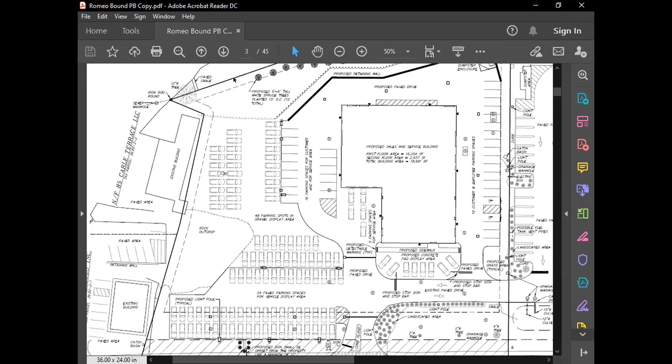Bruce, did you have a chance to look at Brinnier and Larios' stormwater report? Yeah, I took a look at their comments. There's a couple things there I can address. Most all these comments can be addressed pretty quickly between me and him. I'm not sure if there was any comment in particular you wanted to discuss further, but I can answer almost all these right here, right now if you want. But is there one you particularly want to talk about?

Let me just find them. Well, in item one under stormwater, where the reviewer said, please explain the reasoning behind the mapping of soils being different. Yeah, the web soil survey is just a general survey that's out there, based on Ulster County or all kinds of county surveys that are done. Those are just a general layout used for large tracts.

Sometimes these tests for those surveys were done on more than 5-10 acres, and they may have only had one test pit. We actually dug soil test pits out there, and based on what I found, we found a sandy loam soil just to the east of the large rock outcrop that used to be there, at the base of the hill that comes down. Then we found the same sandy soil on the west side of the rock outcrop. So when I drew my soil boundaries, I followed what we found from actual field tests versus just the generalization from the web survey.

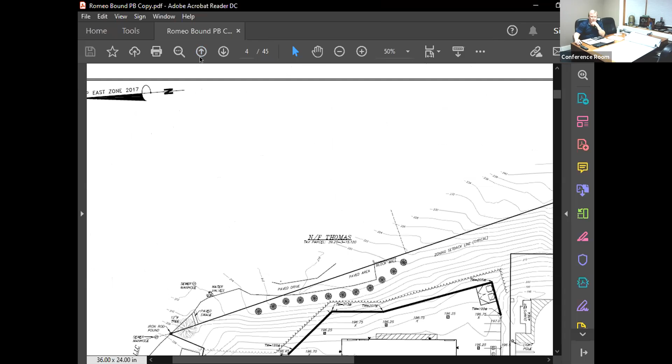The snow, we're gonna have to move some of these cars around, but there is some room for snow. We can pack the snow around the back of these cars on site there. And if it gets to be too big of a problem, they'll just have to truck it off. But for most snow events, we'll be able to push it along the back of this property line here to the east of the rock outcrop.

Okay. Thank you, okay, yep.

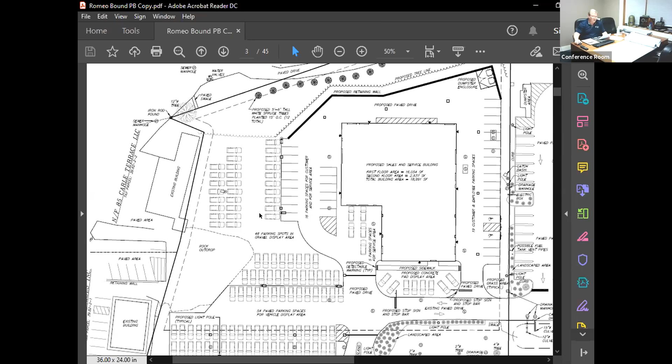Item number 5 on the comments. He asked for the site topography to be shown on the utility plan as well. I don't normally do that because it gets hard to read when that's all on there. We did go back up one more page here. I do have the topography shown on the grading plan, which shows all the rims of the structures that are there, if that's what he was wanting to check out.

But again, I'll talk to Dennis to see what he was looking for there. I don't show that normally for clarity, but there isn't a lot of topo lines here, so it may not be an issue. Okay, fine, thanks.

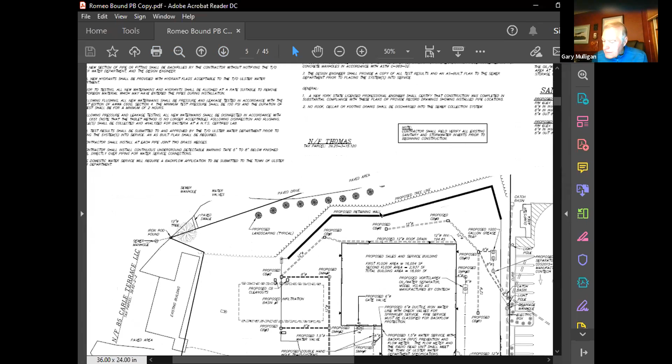Item 6. Yeah, I tried a finer routing in the model and it didn't make any difference. The results stayed the same, so there was nothing more to do for the HydroCAD program there.

Can you briefly explain what he's saying? What he's saying is, in the model, since we're infiltrating into the ground, the model starts infiltrating the stormwater at time 0. So it looks like it's already infiltrating water before the water actually gets there through the pipes. It's a very small, minuscule difference in the amount of water traveled through there. I did the finer routing, tried to get it down to like a minute, and it didn't make any difference to the model. It shows that first instantaneous water going right into the ground before the water actually reaches there. A lot of that's because the time of concentration is so quick for the paved areas and catch basins, it doesn't take a lot of time for the water to get from the catch basin to the infiltration basin. So that's probably why the results didn't change when I played around with the timing.

Are you going to explain that to Paul? Explain it to Dennis, yep. Okay.

Comment 7, basically what I was doing there with the irregular geometry was trying to model the curb along 9W, because the water flows along the curb on the road until it hits a catch basin. So I was trying to model the water flowing along the curb, with the 1-on-1 being the curb and the 1-on-8 being the shoulder going through.

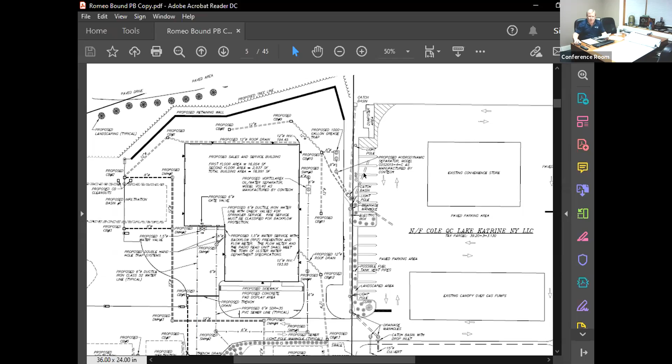For the sanitary sewer, the grease trap, they want a filter on the grease trap, I can put that on there. And the invert elevations, I show them on this sheet. I have a table with all the inverts, ins and outs, and pipe sizes, but I can add that to the detail sheet as well. So that's basically the comments from Brinnier and Larios.

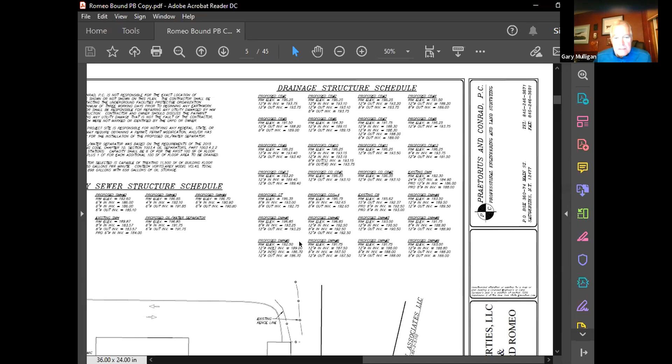The county had suggested a row of trees in the front. I don't see them on there.

No, yeah, that was going to be the next item. I'm sorry, we had this conversation back, I think in one live meeting, on how new car dealers don't like trees for the paint out front. So that was something we weren't thinking about doing, extending those trees out through the front here. We did show a little bit of landscaping around the sign area, and we showed the landscaping in the back that we said we'd give the neighbor for screening, but that's something.

So is it just that you don't want the trees to obscure people seeing the cars on display, or is it more the paint? It's the leaves falling on the paint issue in the fall. Yeah, and they're in the business of selling cars, selling their product, which is cars, and there's that issue as well as far as visibility.

So is there some kind of soft landscaping, low type of shrubs we could do in addition to the area around the sign, maybe some similar type low plantings?

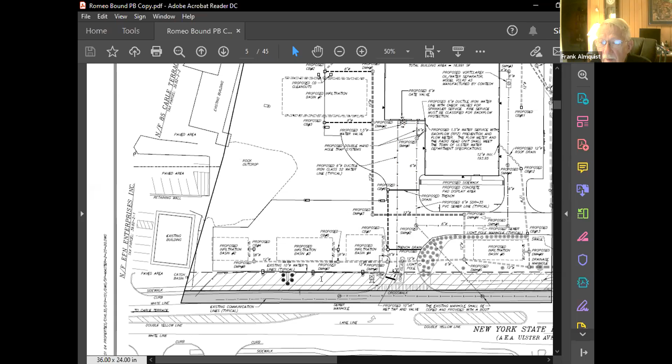You could use some ornamental grasses across there. They don't mind being pushed down in the winter time, and all they need to do is be cut back in the springtime. None of our other dealerships have anything in front of their cars. And I can tell you, as a car buyer, I bought a car that was under a tree, and I have scratches all over my car. So I get the concept of not wanting trees or shrubs around cars, but maybe around the sign would be preferable, not along where cars would be lined up.

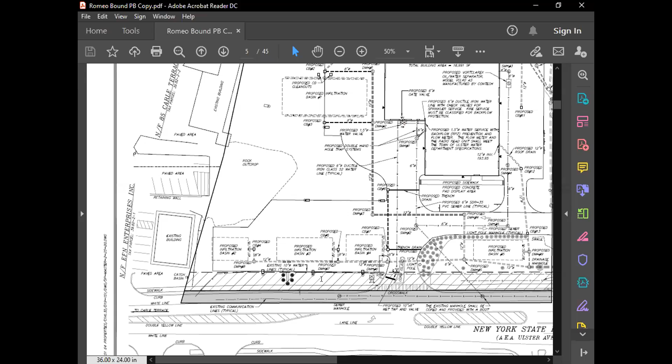Well, they do have, looks like 5 small plantings around the sign. Right there, right? Yes, correct. So, but I agree with Frank. If we did some of the ornamental grasses, they're not a lot of maintenance, and I don't think they're going to cause any problems for the paint if we did it. None at all, along there.

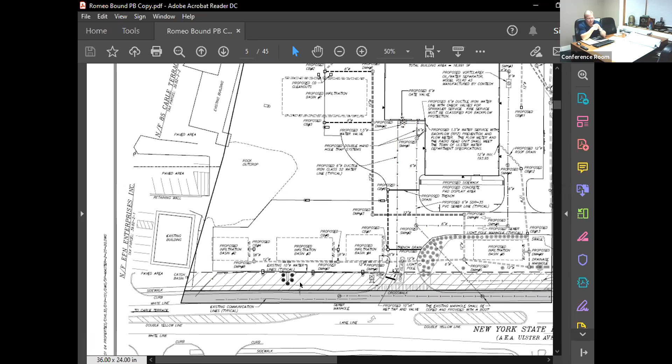I agree about ornamental grass. I agree with that, yes. If you could talk to your client, we'd like to see that. Okay, I can talk to her and see what we can figure out. Okay, thank you.

Gary, go ahead. It's Dan Church. Yes, Dan. So you have the issue that the county made that a required modification, the street trees. Yeah, so we will have to override that if that's the pleasure of the board. Correct, absolutely. None of our other dealerships have street trees. That's uncalled for. Yeah, well, part of it is to stay consistent with the Route 9W corridor enhancement plan.

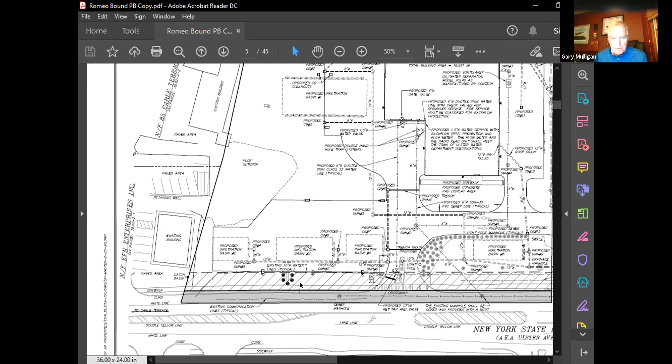And of course, if you read the county's comments, they were very pleased with the street trees that QuickChek put in and the landscaping. And that's the desired effect we're trying to bring about on that corridor. But I agree, across the street, Romeo does not have any trees, and I don't believe Honda has any, or Toyota, or Subaru for that matter. So, yeah, you can't really, you got to go one hand out of the other, and that's just the way it goes.

The corridor enhancement plan mentions as an alternative to street trees, low-lying plantings. Okay, so maybe that's something you could look at options for, Bruce. Yeah, and that might even get the board past a need to override. Yeah, that would be good, if we could do that. I suppose in a sense we're overriding the street tree required modification, but at least it would mitigate it in a sense.

All right, or at least you'd have an explanation of why you're overriding. Hello, this is Lucia, can anybody hear me? Yes. Hi, Lucia, hi there, sorry about that. I've actually been here, I've been trying to unmute myself.

We would be amenable to putting some low plantings, the grasses, anything like that, just not the trees. Okay. I'm fine with that. Board? Larry, I'm good with it. I'm completely fine with that. Okay.

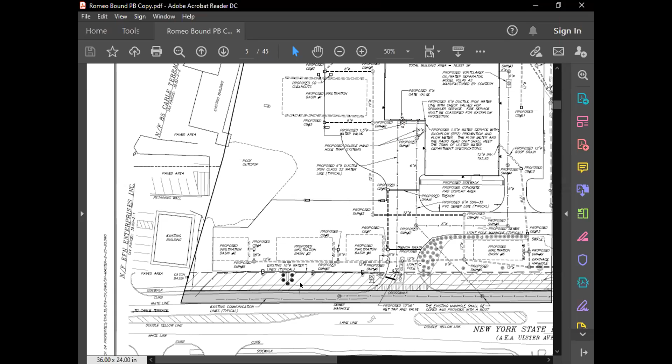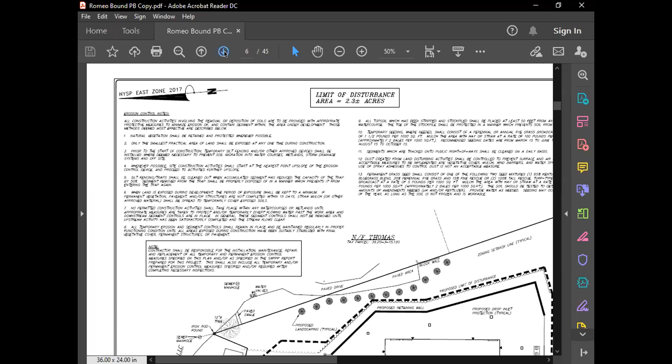Right, okay. Gary, the county also wanted, it may be worth Bruce elaborating on the sign for the board's sake, because the county made a required modification, which I found rather vague, but nonetheless, it essentially says follow the town standards.

On the last page, this is not, we're not going for a sign this tall, but this is the existing Kia sign at the existing dealership. This is what it looks like. So that's why I put this picture on there. Basically this is internally lit up on the top here where it says Kia. That head right there is approximately, I want to say 35 to 40 square feet, given the oval shape. It's in that range of 35 to 40 square feet per face.

This sign here, I think for that dealership, it's 15 foot tall. The next sign down that Kia has, a standard sign, is 9 foot tall. I think monument sign is 8 foot in that zone, but I'm not sure if you're calling it a monument or it allows up to 20 for a freestanding. But that's one thing we wanted to talk about today: if we put the 9 foot sign in there versus the 8, do we have to set it down a foot into the ground or something to meet the 8? I didn't know how critical that was, or if you wanted to call it a freestanding and go a little higher, as far as letting it go to 9 versus 8 for the standard.

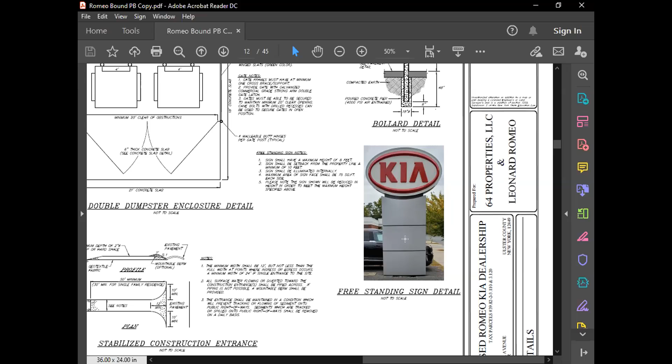So I got to figure out what the base is. Well, if you're proposing an 8-foot high sign, I don't think it's going to be 9 feet wide. I don't think we're going to be over the 75 square feet now. The sign would be taller than it is wide, so I don't think that'll be a problem.

Okay, I think the only other issue was the lighting. We had the lighting plan. I'm not sure if anybody had a chance to go through it. If there are any comments on that.

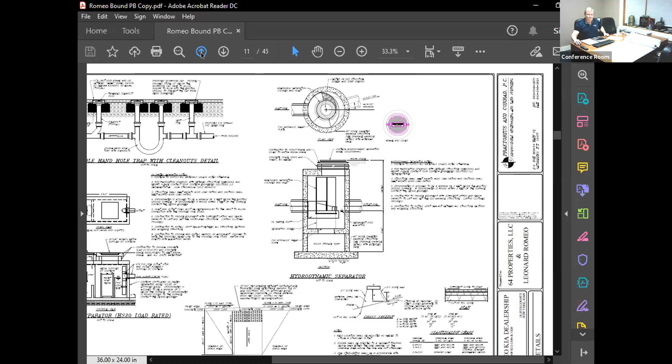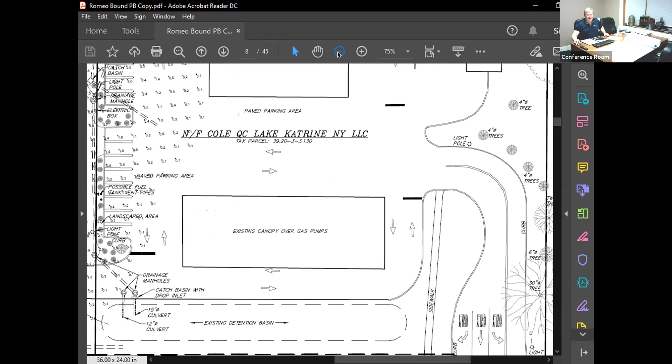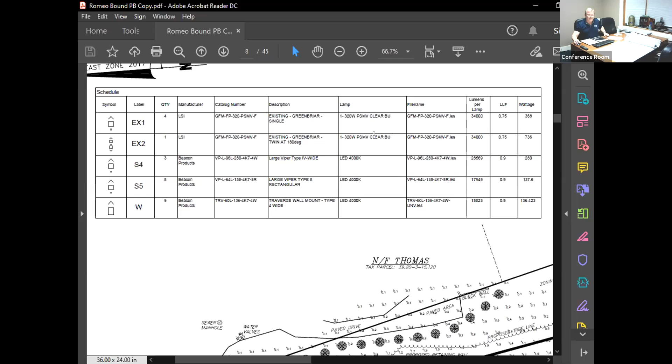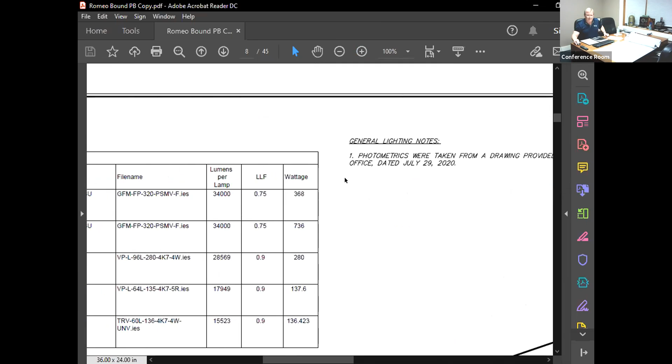So the averages, does it meet the 2-foot candle requirement? Where'd I go? I lost it. Bear with me. This is the table. I'm not seeing where the average is on here, but I was going to zoom in.

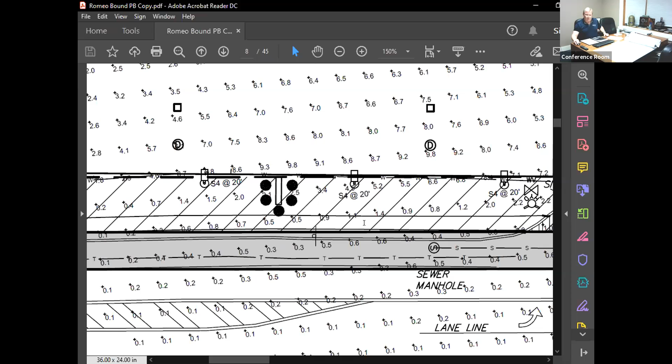You can see the light levels are pretty low. We're basically at half a foot candle near the property lines. Out by the street, we're down to 1.4. Right under the poles, we're at 7, and then it fades out as we go across the site. So I believe we're under that 8-foot candle average through there. But I thought I had that on the print.

I can verify that number with the light manufacturer. I can get that number. Okay, you said you were looking for 8 as an average? No, 2. 2 is an average, I'm sorry.

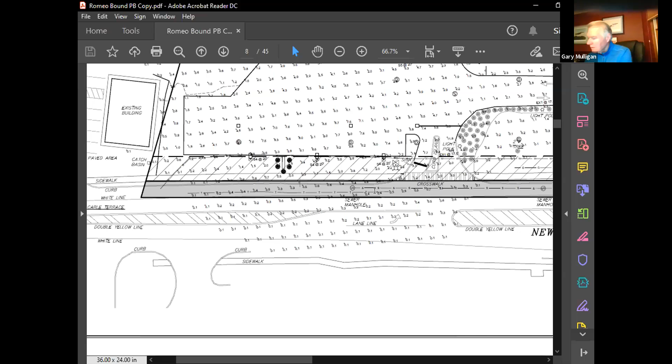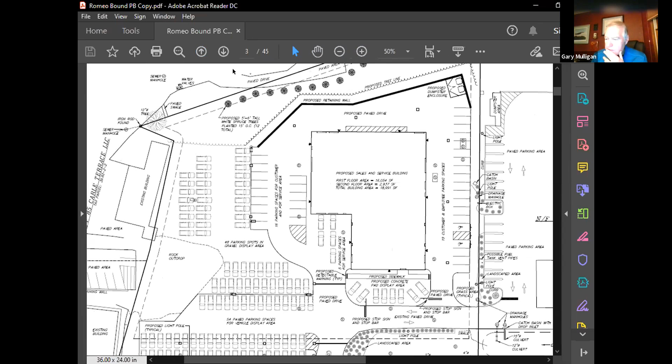I guess I'm open to any other questions the board may have. Board members, any questions? I don't have any. So we also had a lot line adjustment. I don't see where that was. Did we approve that? I don't think we approved that yet, no.

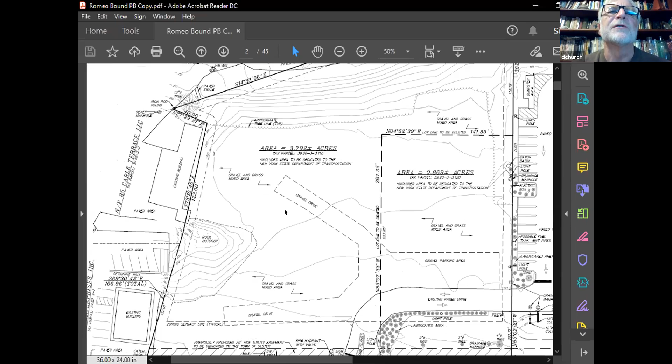On the first sheet here, we showed these lot lines to be deleted. Gary, in Alan's prior review from some months ago, it was discussed keeping the lot line adjustment and the site plan bundled. But it could easily be argued you have everything you need to approve the lot line adjustment right now.

Okay, if I could have a motion to approve the lot line adjustment as depicted in the site plan. Almquist, I'll make that motion. Second. No second. I'll second that. I'm sorry, I didn't realize it was muted.

Gary, one suggestion, Bruce, feel free to comment. You might want to condition it on the town board approval of the site plan. Okay, I'll agree to that. Who knows what'll happen, it appears that's straightforward now, but okay. So Frank, would you amend your motion that it would be conditional on town board approval of the site plan? I'll make that change. And I'll make that change for my second.

Okay, discussion? All those in favor, say aye. Aye. Aye. Larry, aye. Opposed? Okay, it's unanimous. All right.

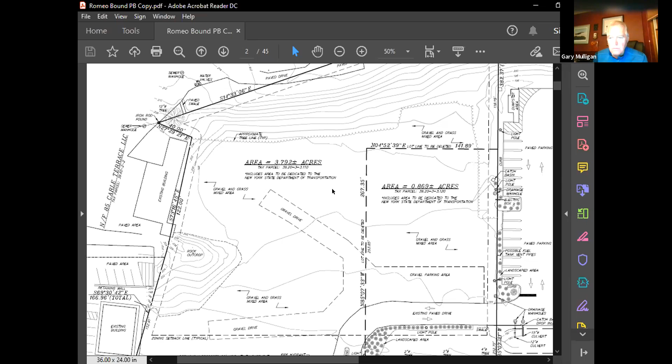I drafted a resolution for referral. Before we go to that resolution, any other questions or concerns on the part of the board? Nope. Almquist here, I'm happy. Larry, I'm happy.

All right, David, would you like to read the resolution for the town board? Sure, I shared it with the board members. With your consent, Gary, I'll gloss through a couple sections. Sure. Whereas applicant Romeo Kia dealership, with consent of 64 Properties LLC, seeks site plan approval with approval of

lot line adjustment for construction of an 18,991 square foot Kia automobile dealership and associated parking, access, landscaping, and infrastructure. And the application includes a lot line adjustment to consolidate two parcels that are identified.

Whereas the applicant has submitted a complete site plan and lot line adjustment application to the Town of Ulster Town Board and Planning Board, including a SEQR environmental assessment form. Whereas the Town Board, in coordination with the Planning Board, previously determined the Town Board was lead agency and typed the action as unlisted and initiated coordinated review under SEQR.

Whereas the application was referred under General Municipal Law 239 to Ulster County Planning Board, who have responded with 2 binding comments, which we just discussed. And I repeated verbatim the binding comments in the resolution.

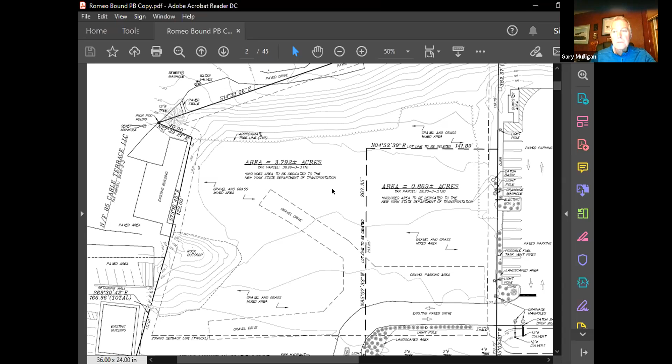All right, thank you, folks. Thank you. Thank you, Bruce. Thank you very much, Luke. You're very welcome. We'll be in touch. I'm going to try to stop sharing now. Okay, I think I did. Thanks. Thank you again. You're welcome.

Next item of business is Lincoln Park Grid Support Center. As you know, they just need an extension of the site plan approval. Is there anyone here from the applicant? I don't believe so, no. Okay, all right, so does everybody understand what's required, what they're asking for? It's a simple extension of a prior approval. Are there any questions?

Okay, hearing none. Can I have a motion to grant Lincoln Park Grid Support Center approval for an additional year? I believe that's the correct amount of time, Gabby. Yes, it's for a year. Right, okay, so it'd be till October 20th, 2021. Almquist here, I'll make the motion. Thank you, I'll second that, Larry. Okay, discussion? Have they paid the requisite fees?

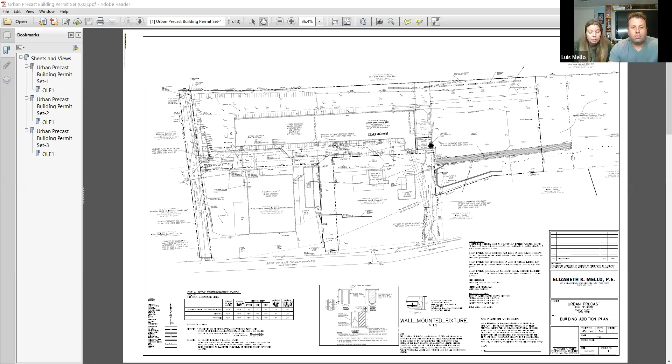This is an existing concrete manufacturing facility located at 6 Kiefer Lane. What we're proposing is a 3,533 square foot building addition to the existing building, which would provide enclosure of a batch plant that exists there.

Right now it's exposed on a concrete slab, and this would allow them to protect it from snow, ice, and cold temperatures, and continue operations over the winter. The area already has the slab, so there's no increase in overall impervious area on the property. We did not find any variances required for the addition, and it's not going to expand the current operation, just enclose a portion of it.

I have the engineer from Urban Precast here, Luis Mello, and he can answer any questions you have specific to it.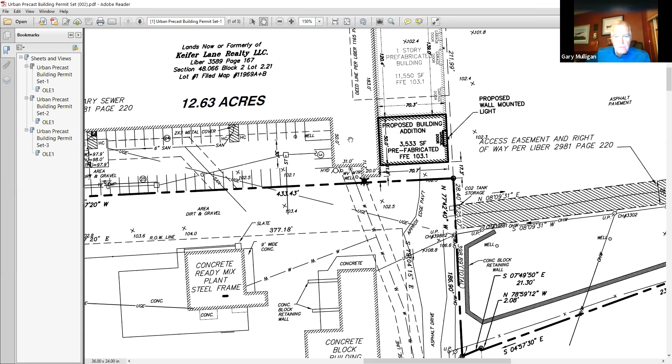Could you just zoom out a little bit? Where is that, on the northwest corner? It's on the northern side of the existing building, yes. Okay, all right, I see now.

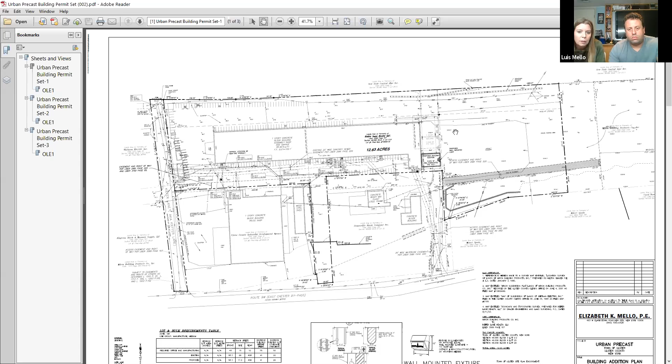The last time we were before the board, there was a building addition done previously for the batch plant. Can you zoom in a little bit? That's this area here, right? Yes. Gotcha, okay. All right.

Any questions from the board?

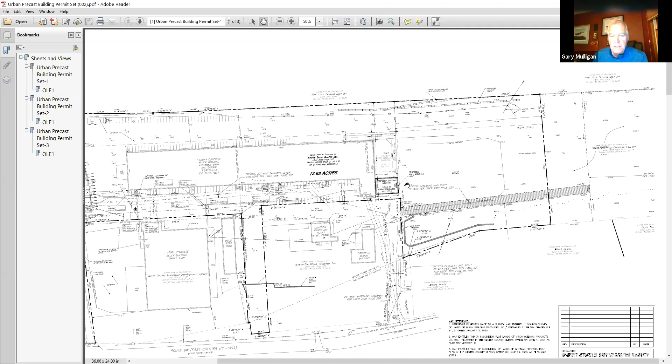Our consultant raised the issue of lighting. Is there going to be any lighting on that additional building? Oh, I see, I'm sorry, you have a wall-mounted light question. Yeah, we do have one additional wall-mounted light on that building, and that will be dark sky compliant. Yes, it will be. Good.

Any other questions from the board? None here. Pretty straightforward. This has to be referred to the town for final approval. Okay.

And so we do have a resolution. Dave, would you like to read that? Sure. This is a resolution for a referral to the town board. There's also a required referral to county planning on this one, however it's essentially exempt from SEQRA because it's under 4,000 square feet as a non-residential facility, so it's a type 2 action. No further action in SEQRA.

So, from the planning board to the town board regarding Urban Precast site plan amendment: Whereas the applicant Urban Precast seeks site plan amendment approval for construction of a 3,533 square foot addition to an existing building, and whereas the applicant has submitted a complete site plan amendment application to the planning board in coordination with the Ulster Town Board, including a submitted environmental SEQRA short environmental assessment form.

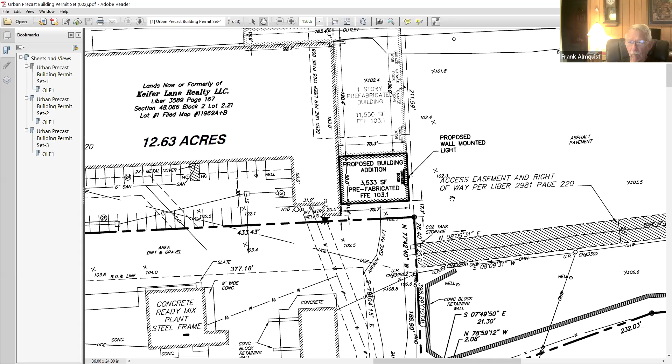Hearing none, we'll do a roll call vote. Ms. Hayner, yes. Mr. Almquist, yes. Mr. Decker, yes. Mr. Stavropoulos, yes. Chairman Mulligan, yes.

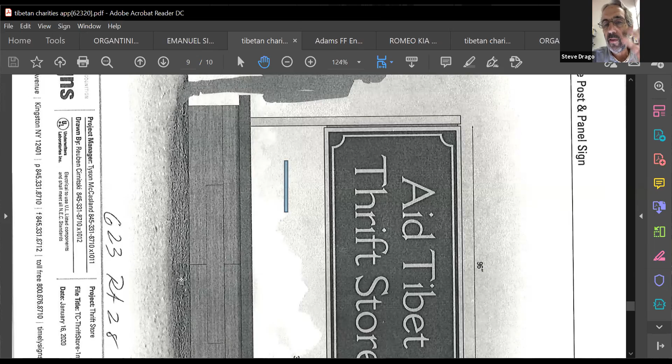There'll be some shrubbery there. The changes from that drawing is it's going to be uplit, which we showed to Warren Tutt, and we will comply with the lighting ordinance, have the proper shrubbery there so that it won't affect oncoming traffic. And we'll be doing the electrical to code and putting it to code with the proper setbacks.

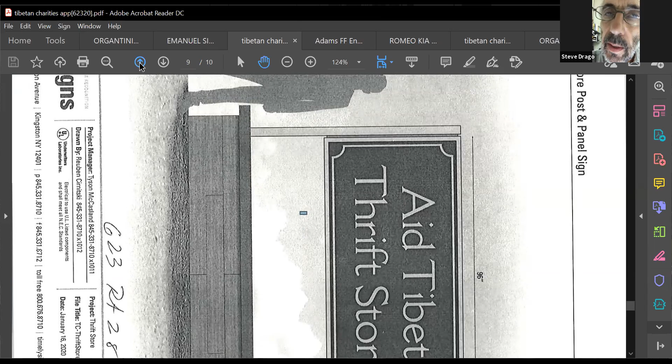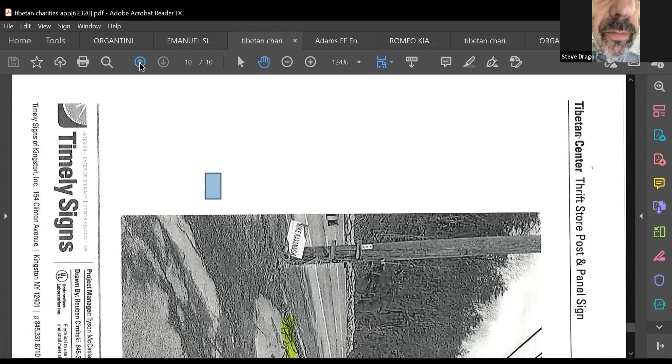We also submitted a survey showing the location, and we spoke to the Department of DOT, Dave Corrigan, and they require a 40-foot setback from the center of the road, which this complies with. Basically the application review recommends - says everything's in order and recommends approval.

Right, the proposed sign is 32 square feet, 8 feet high, which is well within our maximum. Right. And the setback is in compliance.

So this is a Type 2 SEQR action, no further review required. David, any comments?

Well, Steve, you want to explain the lighting? The lighting will be LED spot lighting on the sign, and they will be placed in the perimeter of the base there, shining up. It won't be top-down lit, and there'll be one LED spotlight on either side of the sign.

Okay. Can everyone see the rendition of the sign? Yes. Yep. All right, good. All right, so any other questions from the board? Got it.

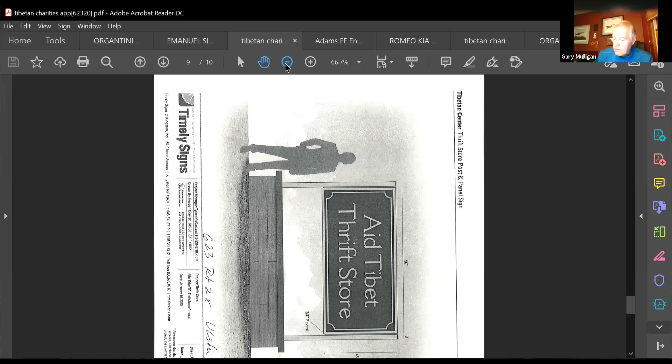That's it. Okay, thank you. Can I have a motion to accept the resolution as read? I'll make the motion. I'll second. This is Andy. Okay, Mr. Almquist's motion, Mr. Stavropoulos, second. Any discussion?

Hearing none, could I have a roll call vote? Ms. Hayner, yes. Mr. Almquist, yes. Mr. Decker, yes. Mr. Stavropoulos, yes. Chairman Mulligan, yes.

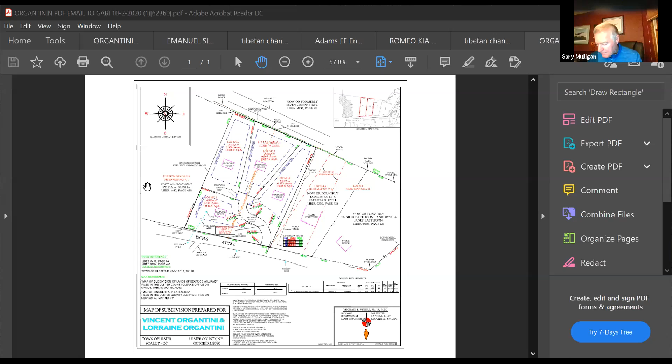Mike, did you get the comments forwarded from John Rose in the Water Department? No, I did not get those. Was that something that was set forth, or? I'm not sure, we sent it to him as a preliminary. Okay, and he'd like to know how you propose to get water to these 4 parcels, since each line cannot cross another parcel.

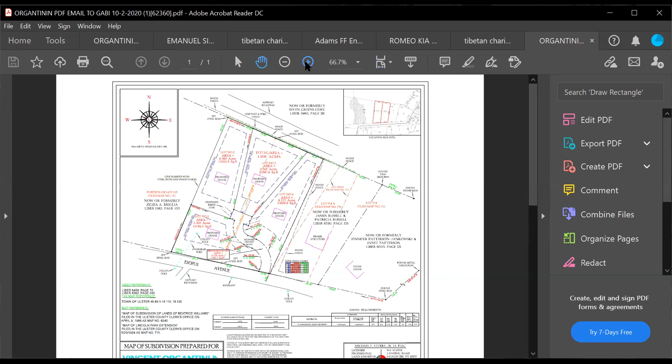We could potentially either run it up the road, which should be no problem, as Mr. Organtini owns Ulster Excavation. So our most likely way of getting it up there would be through the private road, which would be an easement for water and sewer. Otherwise, if necessary, we could have a potential easement through lot number 1, but I don't believe that's going to be required. I will discuss that with Mr. Organtini, but I believe we will use the road for the purpose of water and sewer.

Because lot 1 already has its own service, and there was a service to lot 3, so we have to come up with 2 more services. And I believe the water line is on the opposite side of Esopus Avenue.

Okay, well, that's really not a big setback to us. We will get the water and sewer in there, and we will have the right of way to enter in with the water and sewer through the private road. So getting the water and sewer in there at any point would most likely be through the private road, which should not be an issue. As I see it right now, the easement would be an encumbrance on lot number 1, which we would definitely try to avoid if at all possible. But yes, getting the water and sewer in there would come through the proposed road.

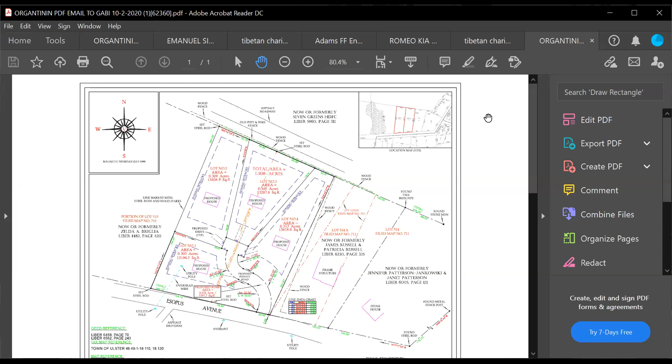All right, any other questions for the applicant? David, any comments, any other issues to address tonight for this application? No, I'm good. Okay, all right, we'll see you next month. Thank you.

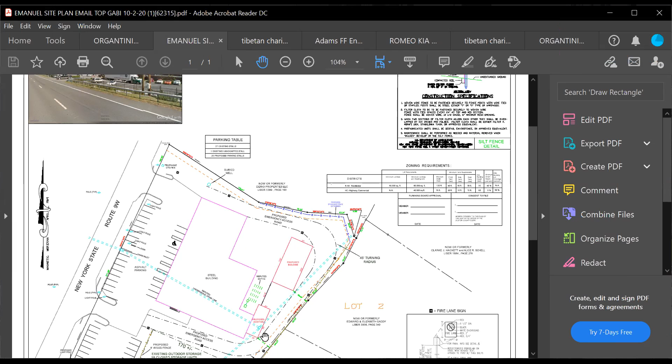So with that being said, we have two buildings there. Since this particular plan was created, we have added a proposed septic reserve area, which was always there, we just did not show it on this plan. We have made provisions for the largest truck that the Town of Ulster Fire Department has, which has a 42-foot, 4-inch turning radius, to fit behind the building. We've made plenty of space for that.

What we are dealing with other than the septic reserve would be lighting. We are proposing 2 full downward LED dark sky compliant lights on each building. The cut sheets, which I have, I'm not sure I can show you right now. If I share my screen... I've got to unshare, I think.

Want me to do that? I'll do that right now. Go ahead. Let me see if I share screen and then pick the file... yeah, I've got to find my file here though. That's my daughter, there, you don't want to see that. All right, I'm sold, all right, here we are.

Here's the lighting cut sheet, are you seeing that right now? Yep. All right, so these are the lights for the buildings. There'll be 2 on each building facing the fence in the rear. Again, they're downward, full downward LED dark sky compliant lights. We spoke to Warren about this this morning.

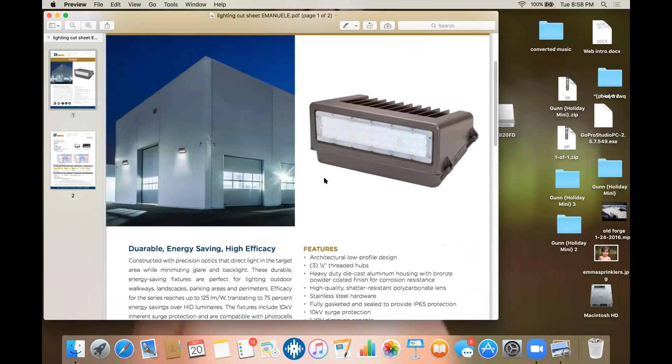In terms of a photometric plan, that's something we don't have showing how the light will shine, but those are the lights for the building. We are proposing 1 pole light, which was asked to be required in the 2017 site plan. This would be the cut sheet for that light, which again is downward dark sky compliant LED, generally the status quo for the Town of Ulster at this point. So we have these 2 lights.

So Dave, back to the plan if you don't mind. No problem, I'm going to stop sharing. With that being said, the septic reserve will be behind the larger of the 2 proposed buildings. We have plenty of space for that. The existing septic is there, and there's plenty of room for a reserve system.

We have plenty of room to get the trucks in there. We had plenty of room in 2017, we proved that. The only difference at this point is we're splitting up the square footage. We are not changing the square footage. So that is basically the gist of our amended site plan.

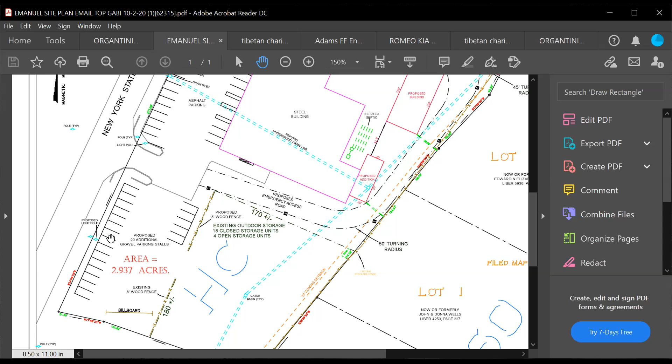Essentially parts storage. Okay, and your proposed parking will be here? Yep, correct, 20 additional spaces along with the lamp that we showed in the second cut sheet. So really the only changes from 2017 are the splitting of the square footage per building. Rather than having one large building, we are having one smaller and one medium-sized building.

So it just seems to me parking is tight on that parcel, and I only say that because when Mr. Emanuel was proposing to take over these lots, he mentioned parking cars there. Yeah, but that would have required us to negate the proposed spots we're putting up front. We would have never had those extra 20 spots if we had moved forward with the lot line revision. Now that we are going back to site plan approval, we are proposing 20 parking spots again, which were never developed due to the fact that we did not move forward with the 2017 site plan.

Mike, what's the proposed square footage of the two combined buildings? 4,500 total. So they only needed an additional 6.5 parking spaces being classified as warehouse space. Yeah, and we approached that in 2017, and we had room for more than 20, but we added 20 just to be safe.

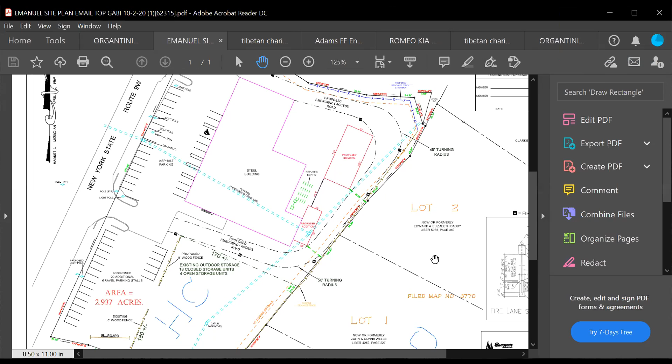We'll do a roll call vote. Ms. Hayner, yes. Mr. Almquist, yes. Mr. Decker? Thumbs up. I can't see him, does he see his response? Mr. Decker... it's like he's dropped off somehow. Larry, can you hear us? Give us a thumbs up. He's there but he's not saying anything. There we go, thumbs up. Okay, there we go, we got a wave. Mr. Stavropoulos, yes. Chairman Mulligan, yes.